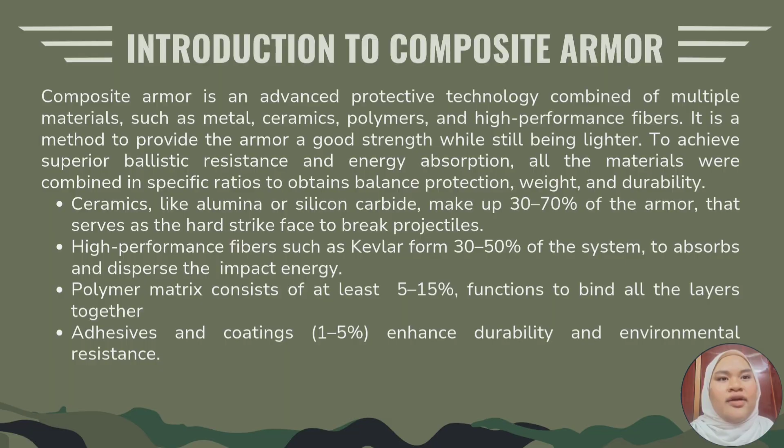Next, a polymer matrix makes up around 5 to 15% that binds the layers together, while adhesives and coatings make up around 1 to 5% to enhance durability and environmental resistance. This ratio might vary based on the threat level and design requirement. This is designed to overcome the drawbacks of traditional steel armor.

Composite armor provides superior protection against projectiles, shrapnel and explosions while being considerably lighter and more adaptable. Its layered construction harnesses the distinct advantages of various materials, achieving an ideal combination of strength, flexibility and resilience for use in military, law enforcement and civilian contexts.

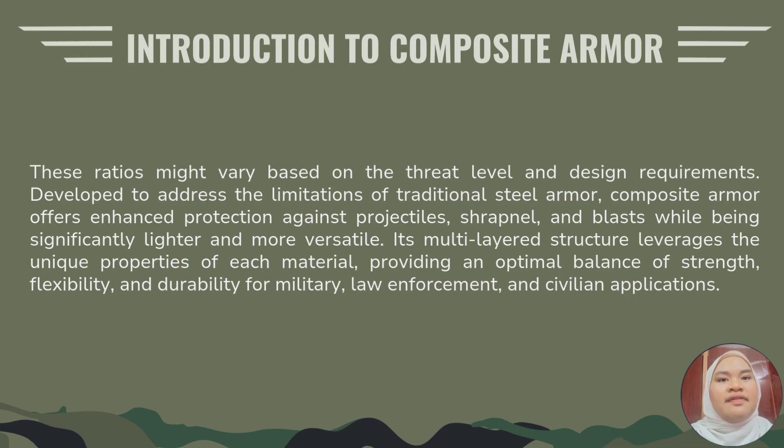For background and history, a composite material is a combination of two or more different materials to enhance strength, durability, and flexibility of the component. They have been used for thousands of years since the ancients. For example, Mesopotamia mixed straw with mud bricks, and the Egyptians used resin-coated linen for boats. Other than that, the Romans developed reinforced concrete, while the Mongols crafted powerful composite bows.

And advancements like fiberglass, carbon fiber, and Kevlar were found in the 20th century to revolutionize aerospace, automotive, and military applications. Today, there are cutting-edge composites, including nanomaterials, biodegradable options, and smart materials that can self-heal. And these materials are widely used in industries like construction, sports, space exploration, continuously evolving for better performance.

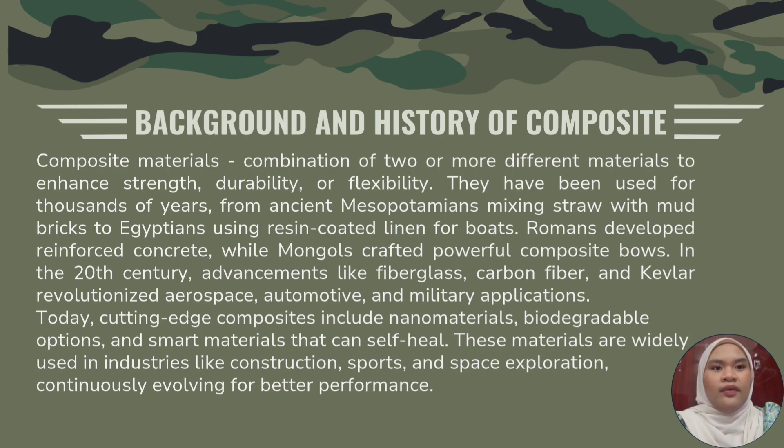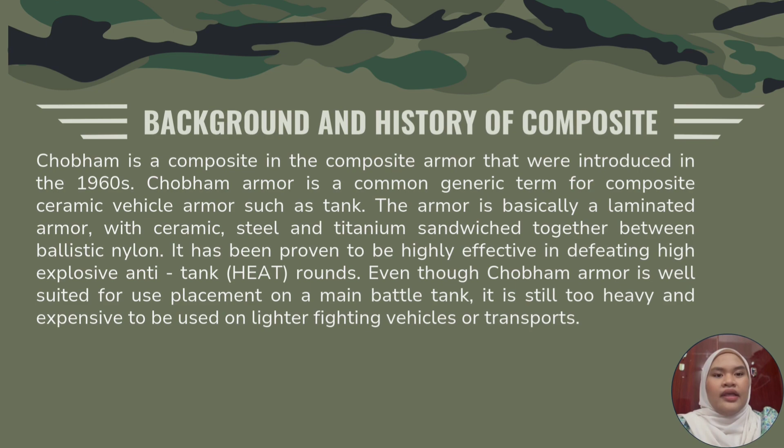Chobham armor is one of the composite armors that was introduced in the 60s. It is commonly used in vehicle armor such as tanks. The armor is laminated with ceramic, steel and titanium sandwiched together between ballistic nylon. It is proven to be highly effective in defeating HEAT rounds. Even so, it is too heavy and expensive to be used on lighter military transportation.

Chobham armor is a form of composite armor that consists of a layer of ceramic sandwiched between two plates of steel armor and is primarily used in military vehicles to enhance protection against modern threats. So the first successful implementation of Chobham armor is on main battle tanks such as the M1 Abrams tank, where it has been proven to be highly effective in defeating high explosive anti-tank, or HEAT, rounds.

So the Abrams uses a variation of Chobham which includes a layer of depleted uranium. So the combination of ceramic, metal, and uranium gives the Abrams one of the highest protection levels in the world. The Abrams armor is concentrated on critical areas such as the turret and frontal arc where the tank is most vulnerable to enemy fire.

Another application of Chobham armor is in the Challenger 2 tank, which offers protection against a variety of threats including kinetic energy projectiles and explosive rounds. So the Challenger 2 tank uses ceramic layers which are more resistant to high-velocity impacts than traditional steel armor. In addition to its ceramic layers, the Challenger 2's armor incorporates spaced armor, which adds an extra layer of protection by creating gaps between the main body and external plates. So these gaps absorb the energy from projectiles, reducing the likelihood of penetration.

I will now talk about the innovations of composites in the military. One of them is Chobham. Although it was first developed in the 1960s, it still remains one of the most effective composite armor systems used today. It involves a combination of advanced ceramics, metals, and plastic layers, and offers exceptional protection against both kinetic energy penetrators and shaped charges.

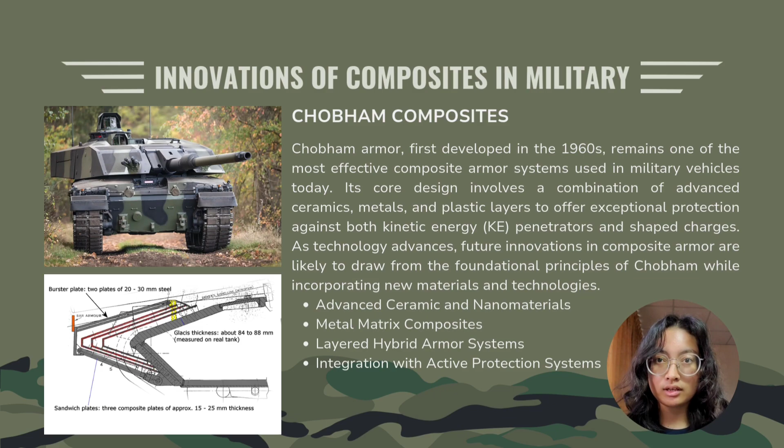There are many advantages if we use composite materials in armor, such as lightweight. Composite materials are much lighter compared to traditional steel armor, which can provide more fuel-efficient vehicles. This means it can improve mobility and agility of the vehicle to avoid ballistic threats rather than protect itself against them.

Secondly, composite materials in armor have a multi-layered design, in which it can reduce mass, exceptional performance against missiles, and multifunctionality. Each layer can serve a specific purpose, and their combinations can contribute to a multifunctional role.

Next, composite materials can provide protection for the armor by absorbing a large amount of kinetic energy during the impact of HEAT or high explosive anti-tank projectiles. In this way, it can reduce the likelihood of penetrating the armor.

Lastly, composite armor's layer construction allows for increased flexibility, conforming to the outline of the wearer's body or the vehicle's shape. This flexibility enhances comfort and responsiveness in combat situations, enabling soldiers and personnel to move more freely without compromising their protection.

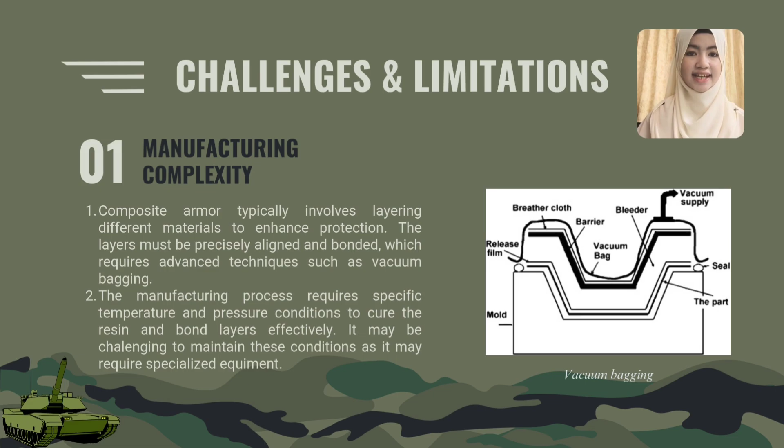To create a composite layer, the temperature and pressure conditions during processing are very important because each layer requires precise temperature and pressure during curing to achieve optimal adhesion and strength. Maintaining these conditions is essential as even slight variations can alter the armor's properties. To ensure the armors perform effectively, layer adhesion is essential.

However, some challenges may occur during these steps, particularly in surface preparation. Effective bonding requires meticulous cleaning and treatment of surfaces to ensure optimal adhesion. Any contamination or inconsistency can break the bond, which leads to delamination and reduced performance of the composite.

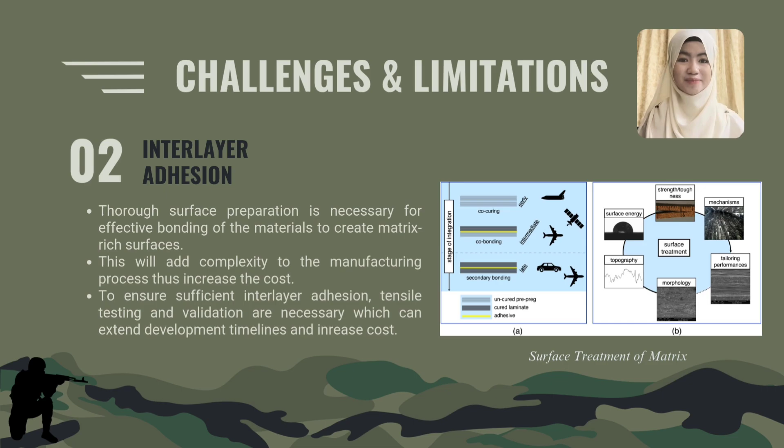And now moving on to future trends. First one, shape memory composite armor. One of the most promising applications of shape memory composites in armor technology is adaptive impact resistance. Traditional armor materials are often rigid, which can limit movement and comfort. However, by utilizing shape memory composites, armor can remain flexible during normal wear and stiffen upon impact.

This capability significantly enhances comfort for soldiers and law enforcement officers while maintaining high levels of protection. For instance, body armor vests with SMP layers can harden instantly when struck by a projectile, dispersing the force more effectively than conventional materials.

Second one, hybrid composites. Combining traditional fibers such as aramid, carbon, and/or ultra high molecular weight polyethylene with ceramics or metallic layers in a hybrid configuration is a growing trend. This approach leverages the high hardness of ceramics for initial impact resistance and the toughness of fibers for energy absorption.

Then the final one, advanced nanotechnology integration. Nanotechnology is revolutionizing the field of composite armors by enabling the creation of materials with superior strength to weight ratios and enhanced energy dissipation properties.

At the forefront of this revolution is the integration of nanostructured reinforcements such as carbon nanotubes, graphene, and MXenes into composite matrices. These materials, owing to their exceptional mechanical and thermal properties, can dramatically improve the armor's resistance to high velocity impacts while contributing minimal additional weight.

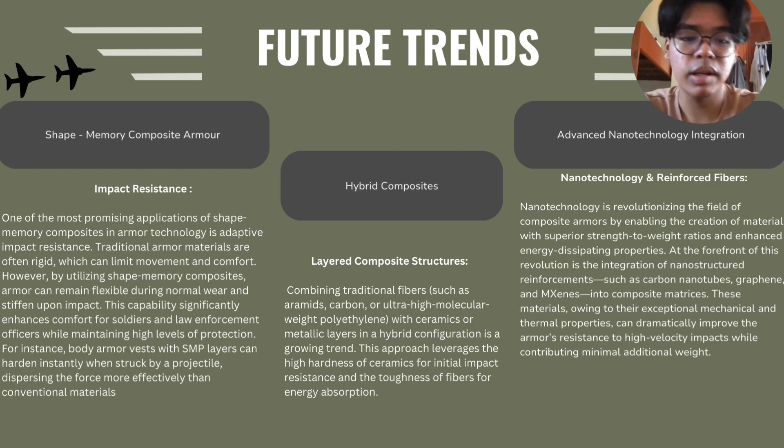And now for the conclusion. In the final analysis, composite materials in armor offer a balance of lightweight protection, durability, and versatility, making them a critical advancement in modern defense technology.

By combining materials such as ceramics, polymers, and fiber reinforced composites, these armors achieve superior ballistic resistance while reducing weight compared to traditional metals. This results in enhanced mobility for soldiers and improved performance in military vehicles.

Additionally, ongoing research continues to refine composite armor, increasing its effectiveness against evolving threats. As technology advances, composite materials will play an increasingly vital role in the future of protective systems across military and civilian applications.